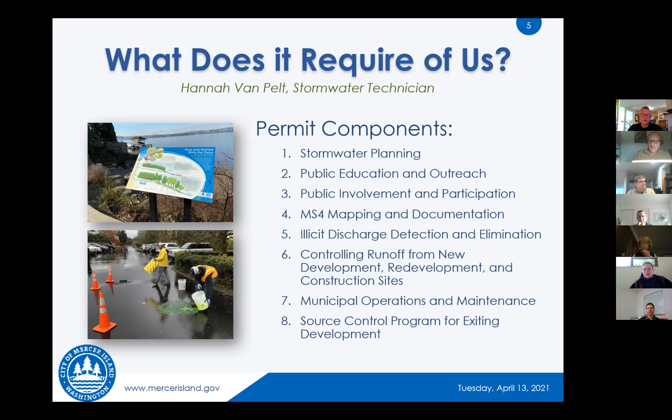It's an inventory and inspection program for all of our potential polluters, essentially, beyond single family homes. This really includes all of the businesses and multi-living facilities like condominiums, senior living facilities and whatnot. All of those businesses and such on the island are going to be held to a set of higher standards of those best management practices (BMPs).

We will establish these through the city code and have yearly inspections. Hey Hannah, can I ask a quick question? Yeah, and if this is covered later, just let me know.

On the illicit discharge detection, is that all just visual, both with city crews and people reporting, or is there regular testing of the water in places? It's both. A lot of the reports are just from people out on the streets and other businesses, like

Recology, for instance, is always communicating with us about spills and things. But it's also something that is looked out for and sometimes even caught with our catch basin and outfall inspections. So there are a lot of visual cues that may instigate further investigation, say bubbles or toilet paper or things like an oily sheen in the water.

In the bottom of the catch basin, those signs may lead us to then do other investigations: water quality testing, dye testing, where we run dye through the line to see if there's a cross connection somewhere, but there's a few different methods that we can use.

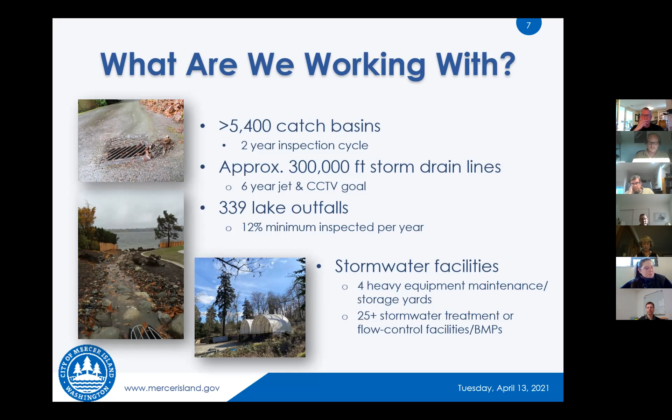Those are inspected at least annually, but also spot checked after every big storm event, just to make sure everything's functioning properly. So to tell you a little bit more about that, that was Chris Kelley.

Good evening, hello everyone. As Hannah mentioned, I'm Chris. I am the stormwater crew lead, and I work on the right-of-way team. Brian is my manager, and I work with Hannah quite a bit. We're just going to talk about how we try to maintain all the infrastructure that Hannah just told you about.

As she mentioned, we do have a lot of catch basins and a lot of storm mains that we have to inspect every year as part of this permit. One of the requirements is once we do identify an issue or a trouble spot, we have about 6 months to address that issue and do our best to mitigate, repair, or replace whatever we need to.

As part of our regular and reactive maintenance, we employ the use of a Vactor truck, which is just a really powerful vacuum attached to a truck, and we use that to suck out catch basins. It also has a jet hose on it, usually 300 to 400 feet long, so it can shoot down a storm line or storm main pipe and clean it out. Once you get that pipe clean, you can then put a camera in and inspect it. That's our ultimate goal, trying to figure out what we're working with so we know what areas we need to focus on.

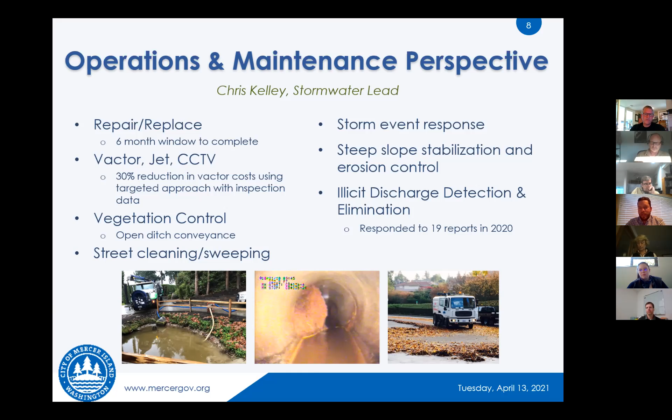So in order to capture video, you need to have a clean, accessible pipe, at least accessible for a camera. And a lot of times we don't. So sometimes this requires cleaning the pipe, sometimes it requires a camera truck to be on standby while the pipe is cleaned. Then they get the camera down and they say, oh, it's not quite clean, we can only go this far, and then the jet truck has to come back up. So it can be cumbersome, but this is what we've managed to compile so far.

And as Hannah mentioned, we would eventually like to reach our goal of getting the entire system blanketed in a 6-year cycle. And we do this in partnership with one of our contractors that we use for the vactor and jetting and camera services.

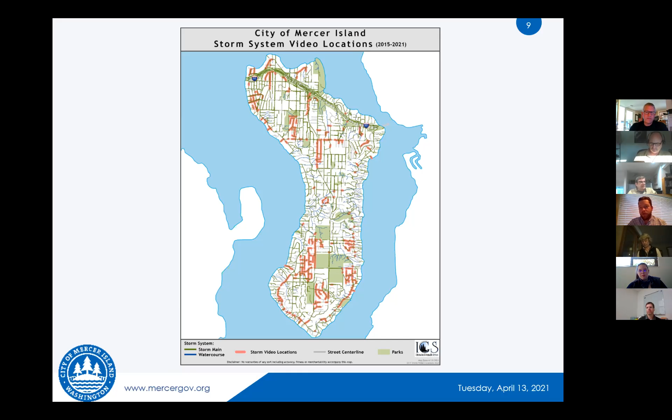Now we'll talk a little bit about the staff that actually does this work. I mentioned we do it in concert with a contractor because we're a little light on field staff. We have one full-time employee that is funded for stormwater, that's me. And also I want to talk about Hannah, who just does a mountain of work for this permit. She does so much in documenting what we do as part of our reporting in order to maintain our compliance with this permit. We really couldn't do it without her, and she's funded part-time for this role.

So as I mentioned, I'm on the right-of-way team. The right-of-way staff assists when they're available or when we coordinate and schedule when we have big projects, or if we have storms that are coming, we know we're going to need help. And then I already mentioned our contracting services and equipment. We don't have our own vactor or TV truck, that's all part of the contract that we use.

And then one other thing that I haven't talked about is sometimes the right-of-way staff and myself will assist with CIP projects in some of the water courses and things like that. And the individual who takes the lead on that is Fred Gu. He's our capital project manager, and he'll go more into depth on those.

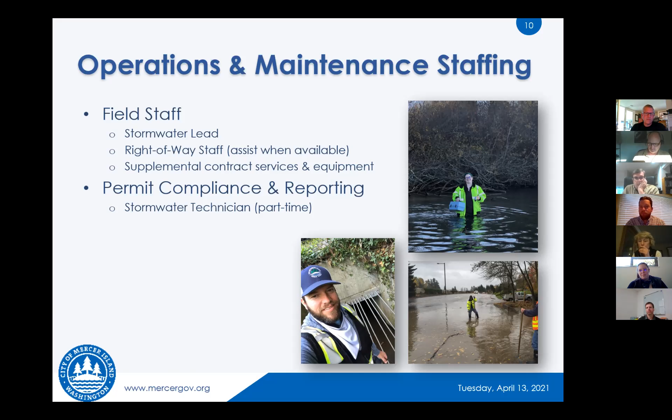All right, thank you, Chris, and good evening. So, Fred, can I stop you for a sec? Yeah, sure. Councilmember Anderl, you had a question? Yeah, I remembered to raise my hand, but I didn't remember to unmute.

So you said we don't have a vactor truck for the stormwater, but we do for other functions, don't we? For the sewer? Not sure. And I was just kind of wondering, is it worth looking into whether purchasing our own would be financially advantageous?

Great question, Councilmember Anderl. So we do have a vac truck on the sewer side of the house. However, I think a key element of what you're hearing tonight is it's important to keep the sewer and the storm separate. The sewer team has additional resources that man that truck, and they're focused on the sewer system. As far as the sewer requirements, we're required to go through our entire sewer system once every 5 years, so it's a pretty robust schedule and pretty tight time frame to get that work done. So due to the number of staff resources we have within the right-of-way and stormwater team, at this point in time, it's been easier to contract out that work for the stormwater side of the house.

However, that might be something we look at in the future. We did just recently convert the sewer side to bring those resources in-house, but we staffed up on the sewer side first. We added 2 new FTEs to help with that workload along the way. So that might be a future consideration. I think it's an important piece to continue to look at as we move forward. Thanks, Jason.

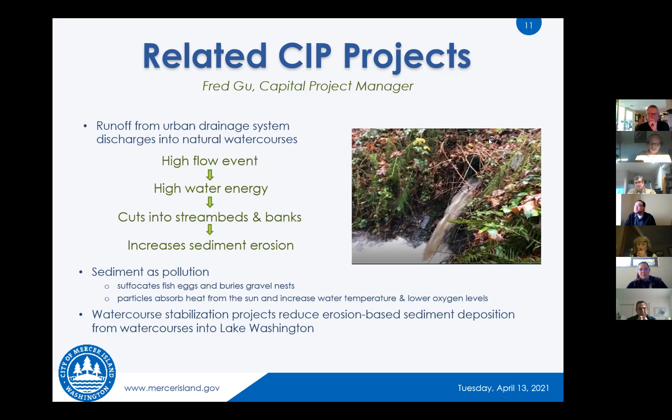First of all, we have to recognize that the water courses are also protected critical areas. If you live next to a water course, you would know there's a buffer zone that you cannot build into. That's something we have to keep in mind when we implement our projects.

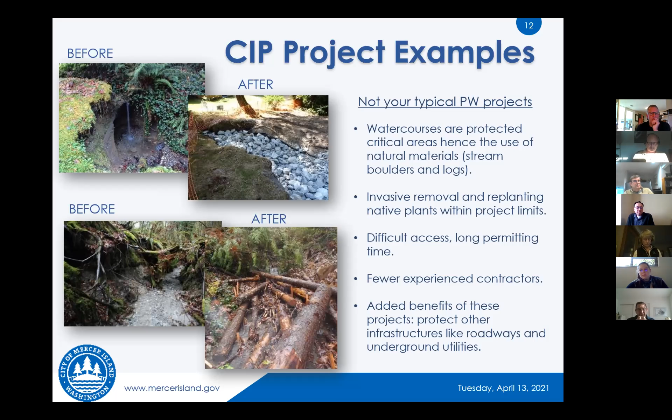So next we have Ruji Ding, our senior development engineer, who can talk about mitigation requirements for the private development side of things. Thank you, Fred. I'm Ruji Ding, Senior Development Engineer with the City for a long time.

I'm mainly working on private development related projects and permits. So I'm just going to talk about stormwater requirements for private development projects related to new homes and major remodels. It's very personal for regular homeowners.

So like Hannah was talking about, the NPDES permit established requirements to mitigate stormwater runoff from private development projects, like new homes and even town center projects. Those projects create new impervious surfaces, like new driveways, added roof, added walkways. They create runoff, and those projects require mitigations.

So the requirements were adopted in the city code in July 2018. Any permits applied for after July 2018 will have to meet this new code. There are quite a bit of mitigation measures for the requirements. I'm just going to talk about the 3 most common ones we use in Mercer Island.

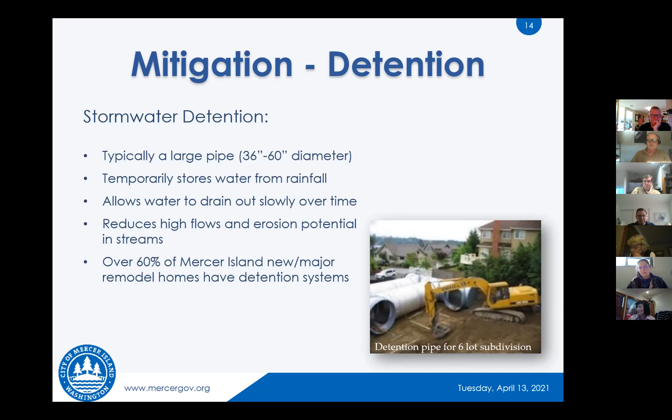The second mitigation measure we use is low impact development. Ross discussed a little bit about it, but the basic concept for this technique is to keep the rainfall on site by using natural processes. The most common techniques we use here in Mercer Island are infiltration systems and rain gardens.

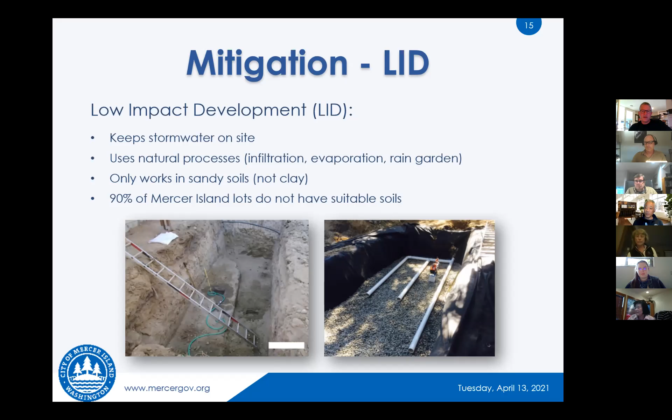Really briefly, when we were updating our stormwater regulations back in 2018 or so, as a requirement of our NPDES permit, we knew we were going to have all these updated stormwater requirements, and we knew most of the soils on Mercer Island were not good. We wanted to find a convenient, low-cost way for people to figure out whether infiltration or low-impact development techniques were viable on their site or in their neighborhood.

So what Ruji was talking about is that we have a map that shows areas more suitable for infiltration, meaning the soils are sandier. And like Ruji mentioned, about 90% of Mercer Island is not that way — most of it's clay.

Okay, thanks, that's great information. Appreciate it. Brian?

Yeah, I was just going to ask about the detention pipe system. You showed an example in the picture that was for an installation for 6 homes. Is it a smaller size for a single home if somebody was substantially remodeling an existing facility, or is that the same size?

The size is based on the added impervious surface area. So to give you an idea, if a home has 3,000 square feet of impervious surface roof area, you'd be using a 36-inch pipe about 40 feet long.

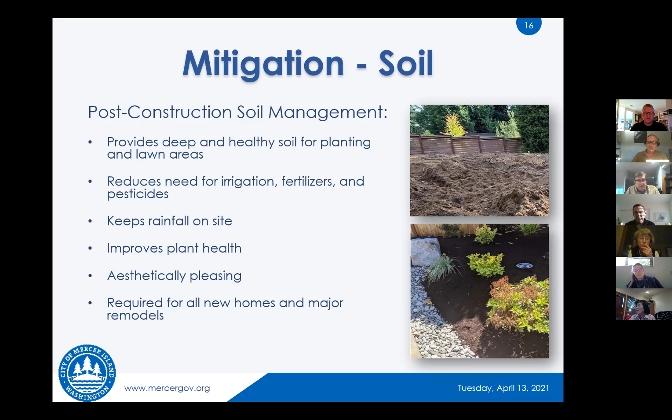The last thing is the city does provide education resources to customers. When city hall was open we had printout handouts; now when customers ask, I provide them the website. We have tip sheets for homeowners, and more detailed design guidelines for professionals like engineers and architects, so they know what needs to be shown on the plan.

We also have the city's interactive web map, which Council member Lisa was asking about. That map shows utilities, aerial photos, soil conditions, and if you type in the address, it tells you if there's a storm system near your house, or if the soil is good for infiltration or LID measures. It's on the public website, so anybody can access it — it's very helpful.

I hear a lot from homeowners and architects — it really helps them save money because they don't have to hire a geotech to determine if infiltration is possible.

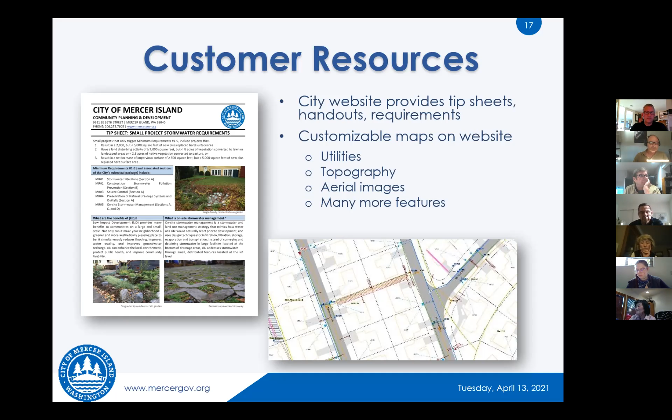So yeah, with that you've all received a tremendous amount of information from different portions of the staff. I think you have a great cross-section of all the staff that touches NPDES from different aspects, and now would be a great time to open it up to questions. I'll invite staff to turn your cameras on and we can get started.

Great, well thank you, that was a great presentation from the Public Works staff, appreciate that. And it looks like the council member has another question.

Well, I just wanted to make a comment. I apologize, I thought this meeting only lasted till 6:30, so it's great that you got through the entire presentation. I want to mention every one of your names, but I'm afraid I'll miss one. Patrick, you and your team have done an outstanding job. This is super informative, and I look forward to picking up a copy of this presentation to send to the full council.

Because I know they'll be super interested in it. One of the comments I hear most from citizens is infrastructure. They really care about water, sewer, stormwater, and maintaining the streets and those critical infrastructure components. Having broader depth of knowledge because of presentations like this really helps me do my job. So thank you all very, very much. Thank you, council member.